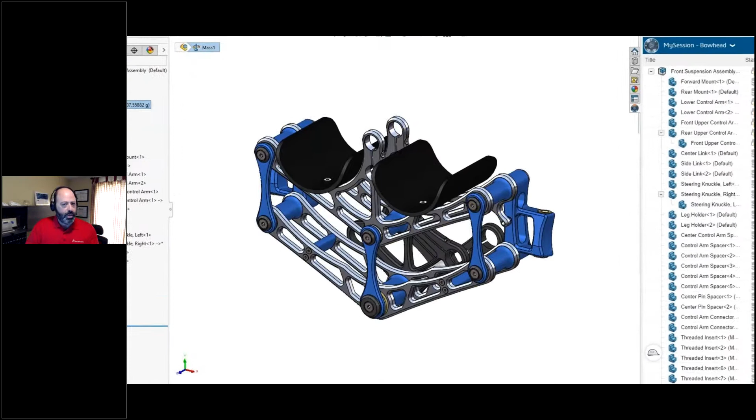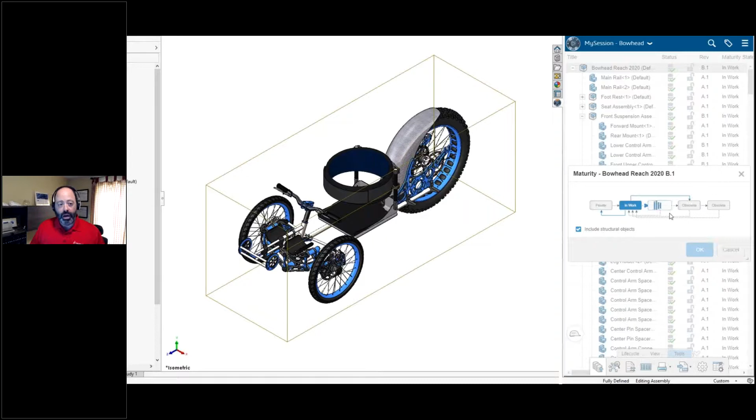For example, I make a design change and I need to know what other assemblies or parts this is going to impact. I have a visual reference of everything that touches this design. I can also use what we call maturity states to control the life cycle of the product - so it's in work, then I put it to frozen because I want to do a design review. And then we can go even further to do issue management and change action, to really track design changes.

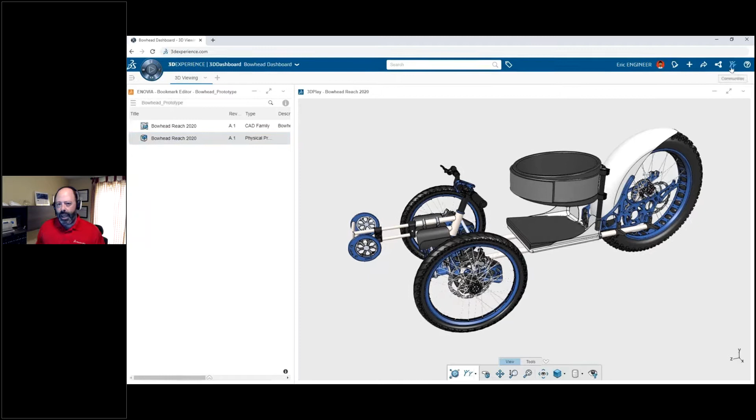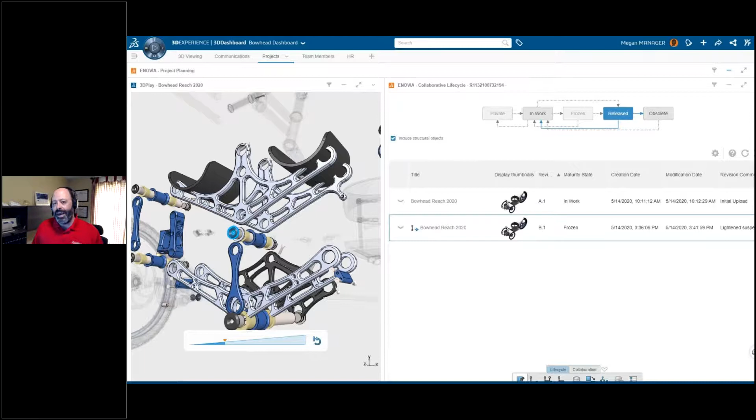Furthermore, since the data is now stored on the cloud, I have access to that data using any type of browser, on any device. So if I just need to visualize the data, I just need an iPad and an internet connection. I can even pull that into a project planning tool - we have that. I can review revisions, I can change the life cycle of the product. So if I'm at home and I just want to review a design and approve it, I could do it from my iPad. I don't need a computer, I don't even need SOLIDWORKS, because the data is hosted on the cloud. So it becomes very easily accessible, and we can actually do quite a bit from there too.

Now, when we talk about Collaborative Designer for SOLIDWORKS, who's it for? It's a tool built for engineering teams that are not currently using PDM. Not because we don't like you if you are using PDM, but if you're using a typical SOLIDWORKS PDM Standard and you want more functionality, like being able to access data from the internet, well, there's an upgrade path to go to PDM Professional. It's the same system, works the same way - there's no migration of files to do, anything like that, so it's much easier.

And if you have PDM Professional and you want to do resource management, project planning, well we have another tool called SOLIDWORKS Manage that's built on top of that. So it's very easy to upgrade if you have a traditional PDM tool, whereas Collaborative Designer is really built for people that don't have anything today, but they want a centralized, secure place where they save and control all their data.

The other benefit with Collaborative Designer for SOLIDWORKS is that you don't need any servers, you don't need anything to host the files. The files are hosted at a data center and everything's being handled there. The only thing you need is an internet connection, that's it. So if you don't want to invest in a server or invest in software to host the server, you don't need any of that - everything's done on the cloud.

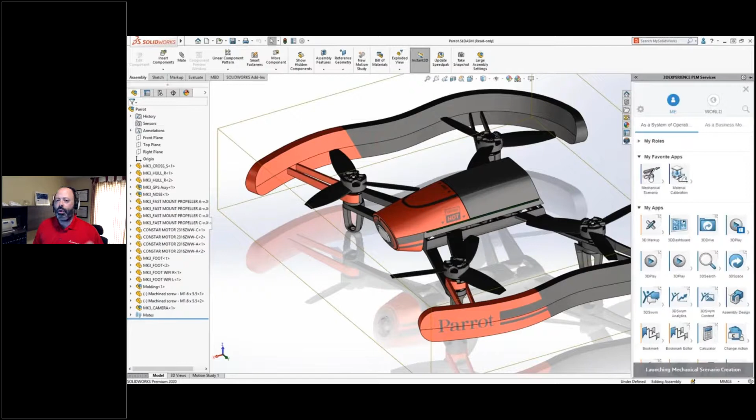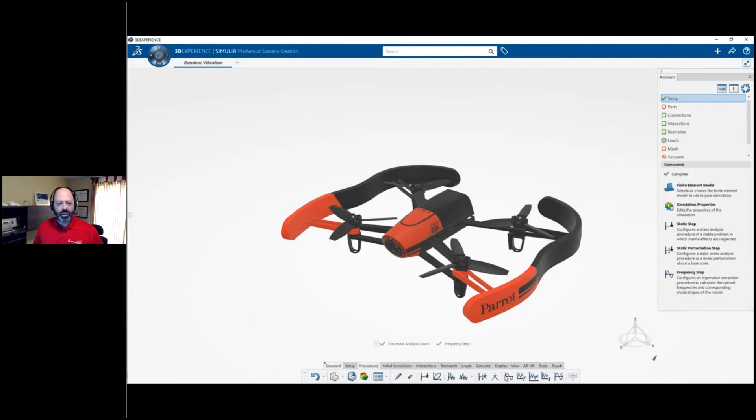So again, we start from SOLIDWORKS, but from SOLIDWORKS we're going to save to the cloud, and then we're going to leverage tools dedicated for simulation. Here we'll walk through an example where I'm reusing the SOLIDWORKS data to create a vibration analysis. This little drone tends to vibrate because of the motors, but also because of the turbulent air going around it. So I want to make sure that my electronics is going to survive this.

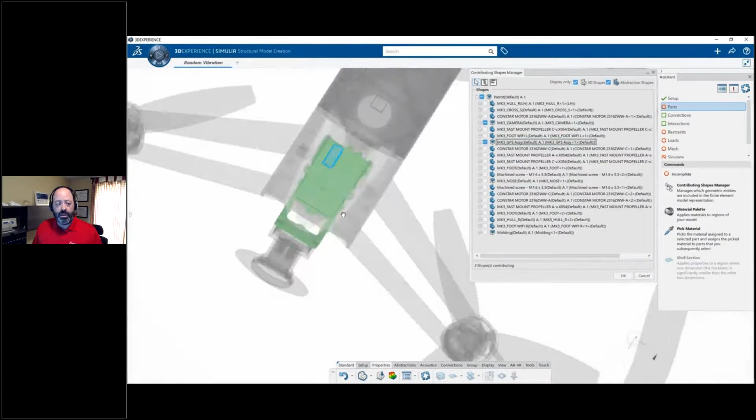If you've done simulation before, you'll see that it's a very similar process. You start by setting up your simulation, what type of simulation, and then you're going to select which parts of this whole assembly. I don't want to analyze the whole assembly. Really what is critical here is the electronics, so I'm going to select the electronics to define that this is what I want to analyze in detail.

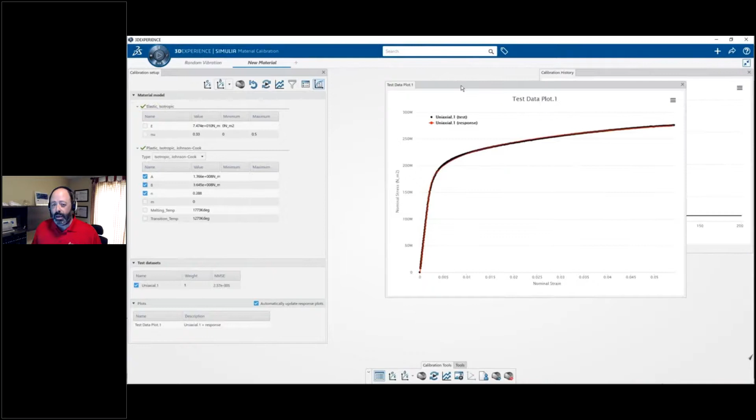Then I'm going to assign material. There's a library of material, you can create your own, you can import material from the SOLIDWORKS design if it's there. But there's a nice option here where you can define your own material based off physical testing. Very common if you're dealing with a lot of plastics and things like that, you can create physical tests, get the test data, and then create the model, the physical properties for that material, and apply that to your design.

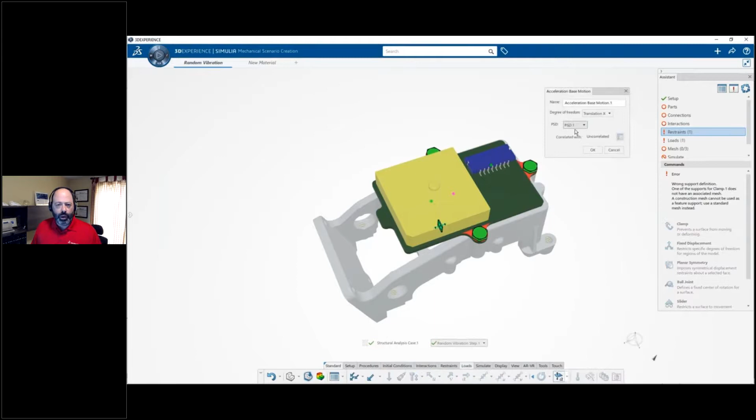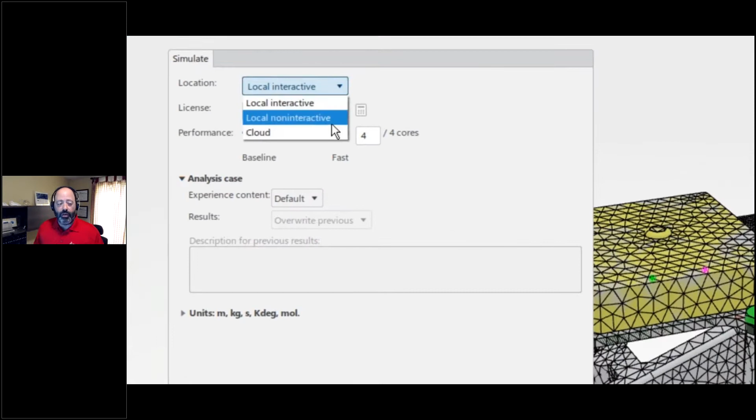Once you do that, the next step would be to define how the assembly is held in, how the parts are supported in the assembly. We've got a lot of shortcuts and what we call connectors to help you do that, like bolts and screws and things like that. Just saves a ton of time. There's a lot of automatic meshing capabilities, but also more advanced meshing capabilities with quality mesh checks, so you can verify that your mesh is good quality.

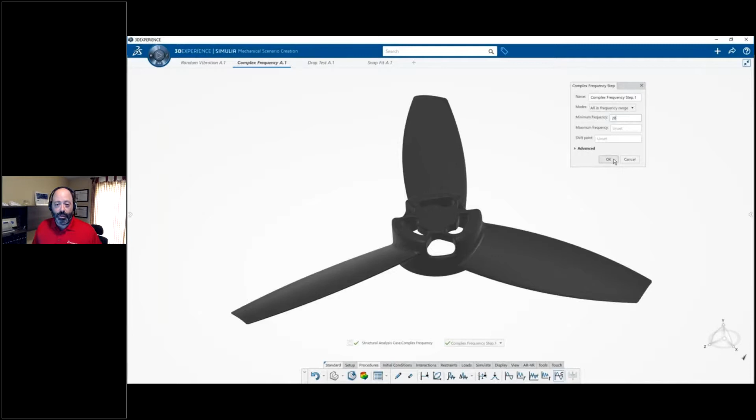One of the big benefits is also the ability to solve using the cloud. Rather than solving on your local computer, you can send the calculation to be solved on the cloud, which is much faster for very big problems or solutions that need a lot of computational force to solve. Again, a bit more examples here.

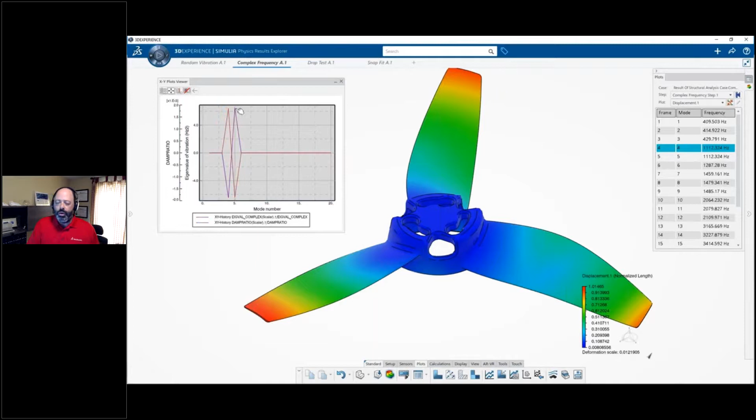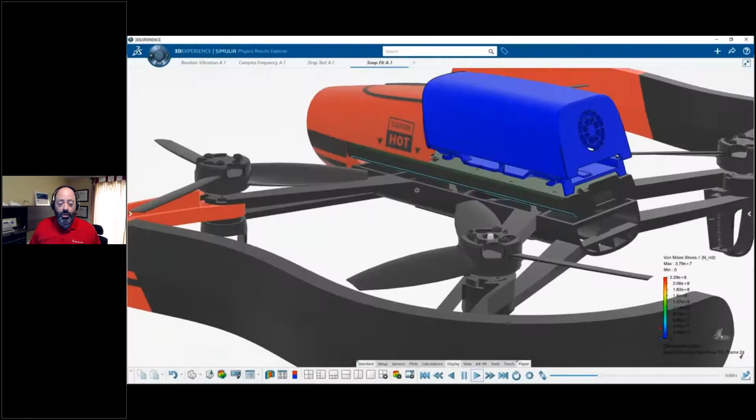We're looking at vibration analysis, but it's really getting into some of the more advanced simulation. We have tools on our current desktop products with SOLIDWORKS Simulation, Simulation Professional, Simulation Premium, but in some cases you actually need more capabilities—like advanced drop testing, think hyper elastic material, complex contacts that you need to solve, and maybe just very large simulation problems. This tool is really great to do that.

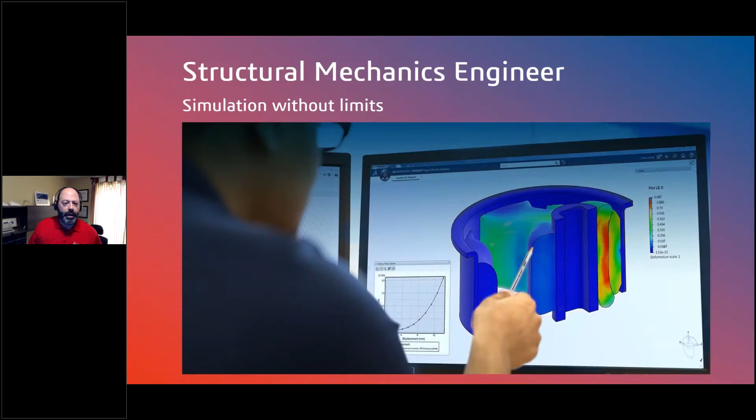So it really goes beyond what we can do in our traditional desktop product line. If we recap quick, who's it for? Structural Mechanics Engineer is for when you need advanced simulation capabilities going beyond what we can do in traditional SOLIDWORKS Simulation. Some companies, some people, just want to use the Abaqus technology, and that's what we're using inside of Structural Mechanics Engineer. If you're not familiar with FEA, Abaqus is the most powerful solver on the planet right now, being leveraged by automotive, aerospace, defense industries.

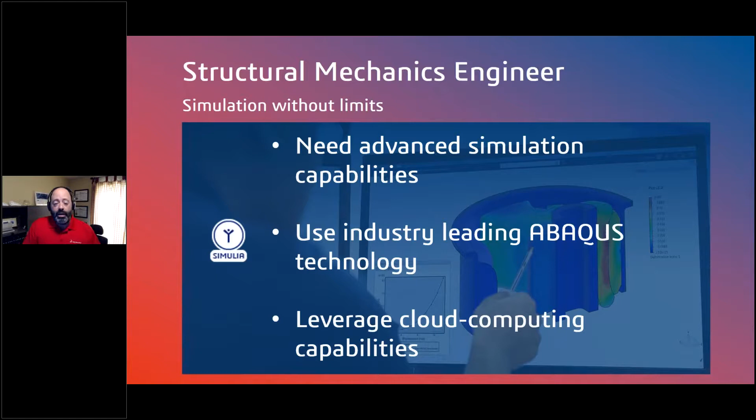So very high-end type of simulation and technology. Also a big benefit here is that you can leverage the cloud computing capabilities, so you can set up the simulation on your computer, but then send the calculation, the solving, to the cloud so you can solve it a lot faster.

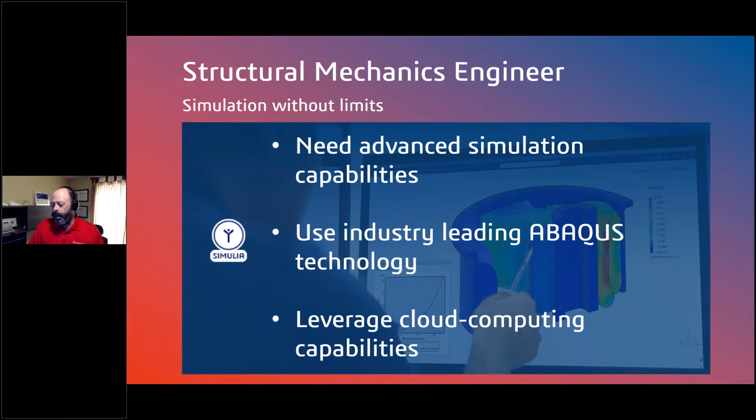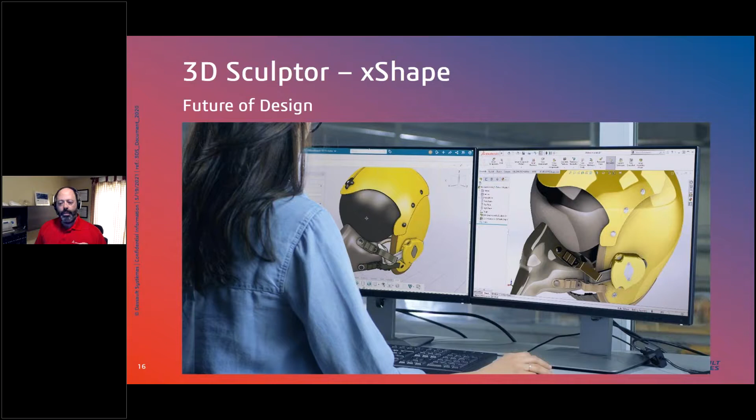Now we talked about simulation, let's get back to design, right? So if you're here, you're likely a SOLIDWORKS user. I'm going to show you something that you're not able to do inside of SOLIDWORKS, using a product called 3D Sculptor or xShape. Really, this is for users that need to do organic shapes. If you do a lot of surfacing, the swoopy curve kind of model, this is for you.

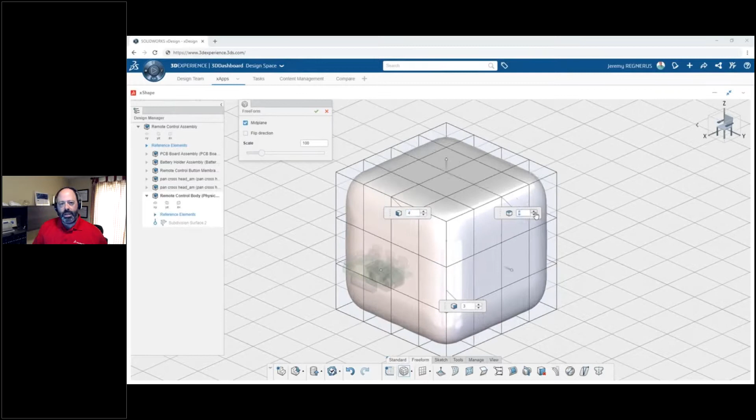So I got this example where I got a remote, like a TV remote, but the core components are done inside of SOLIDWORKS, and I want to have a nice shell going over it. Now typically inside of SOLIDWORKS you would start with planes and sketches and splines, and control the curvature of those splines and tangency control and all that.

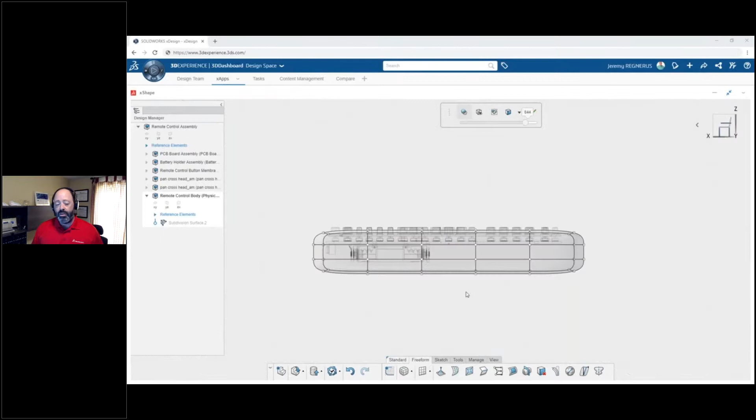Using 3D Sculptor, it's a very different approach. Rather than starting with a sketch with splines, we actually start with the primitive shape, and then using different types of control—you're going to see some of them here—you're actually going to just push and pull and get it into shape.

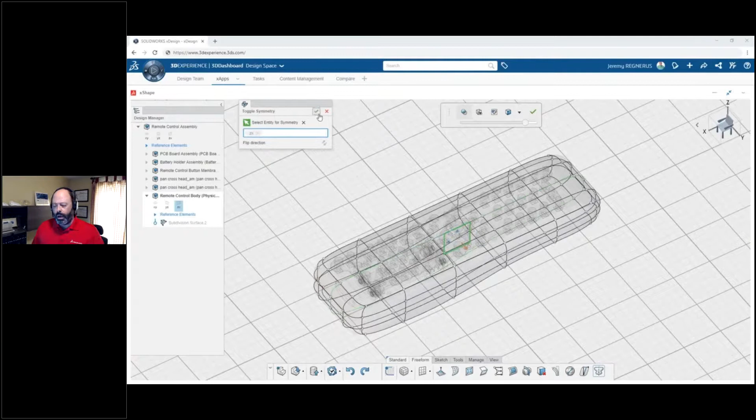See, so we simply window select some of those control points using the little robot. We simply push and pull into the shape we want this part to be. You could also, we didn't do it here, but you could import a background image and use that as a starting line. But see how easy it is, you just push and pull.

Here I've added a symmetry plane just to make sure our remote is symmetric. Now everything I do on one side of the remote is being applied on the other.

Now you saw me pick the control points. We can also change how we control this shape. Here we're also using what we call the cage, which surrounds that model. It's just a different approach of how we control the modeling of this part.

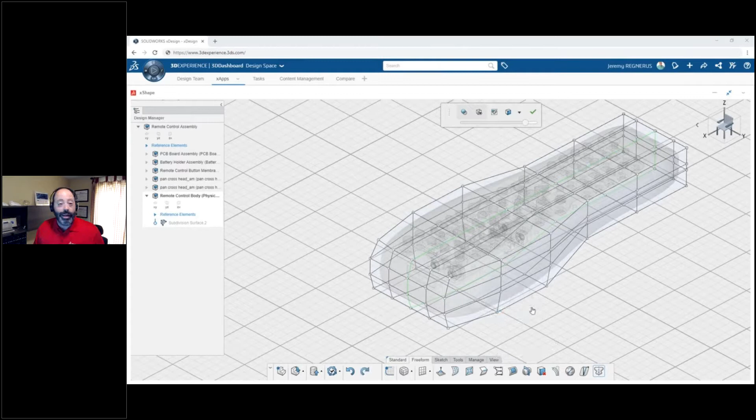So you see here, it's very, very easy. There's no sketch involved. You could use a sketch if you really wanted to, but oftentimes you just don't need to. You just push and pull into the shape you want. You can use the points, you can use the curves, what we call loops here, and faces as well. You basically really just push and pull into shape.

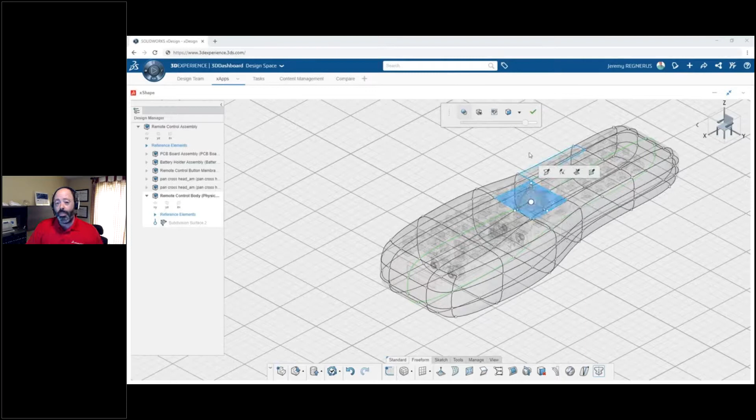Now I used one primitive. You can actually add more and then do some Boolean operations like adding and subtraction, add a fillet at the base of these two combined objects. So again, very, very easy to mold it into place.

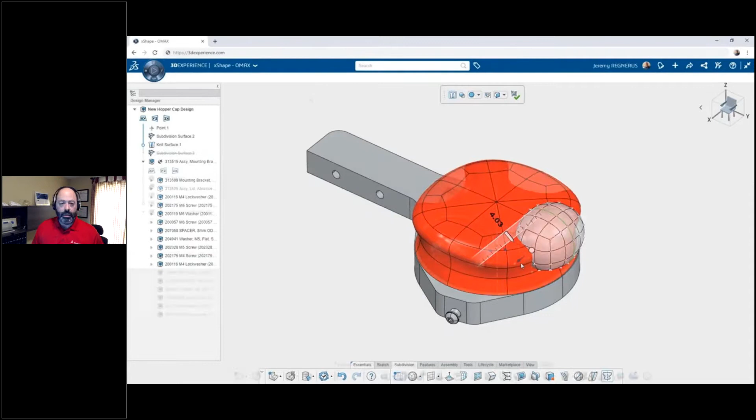Here's another example for a handle where I want to have that shape, so I do a Boolean operation to subtract. Again, everything you need to design that has some organic shape, complex curves, curvature is really important. xShape, or 3D Sculptor, is a great tool to help you do that.

So let's recap real quick. Who's it for? If you're doing any type of organic shapes or complex surfaces, this is likely a tool that you'll want to touch on.

One of the benefits, and we didn't see it in the video but we'll talk over it when we do our sessions, and I think it makes sense to do a session on 3D Sculptor by itself, is the tight integration with SOLIDWORKS. There are other tools on the market that can do some of that, but if you want to work with SOLIDWORKS, like for example the remote, I would have needed to export the remote out of SOLIDWORKS first, import that into another software, maybe do the modeling there, and when it's done, bring that shape back into SOLIDWORKS.

So it's just really hard to do all of that. With xShape, it's a drag and drop, and nothing more to do, right? So it has a really tight integration with SOLIDWORKS.

One of the other benefits with xShape is that it's a fully cloud-based tool. What I mean by that, it runs inside of your browser. So a lot of designers like to use Macs, they like to use iPads, one of the benefits of those devices is they're really touch oriented, or you can use a touch or your stylus.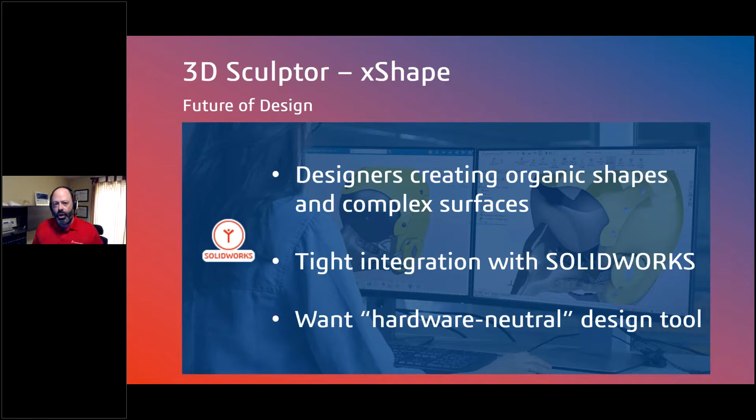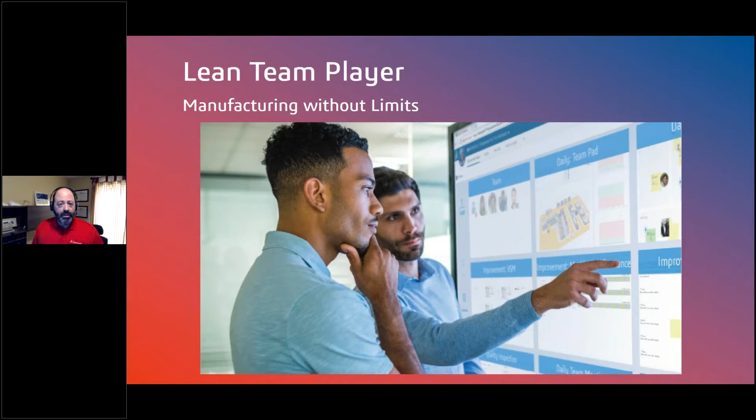So we talked about design. The last category I want to talk about is manufacturing. And I'm going to start with this first tool called Lean Team Player. Let me ask you this.

How often, pre-COVID, were you in a meeting looking like this, where you're not sure why you're in that meeting, and you see probably half of the people in that meeting doing something else? Happens in web meetings as well.

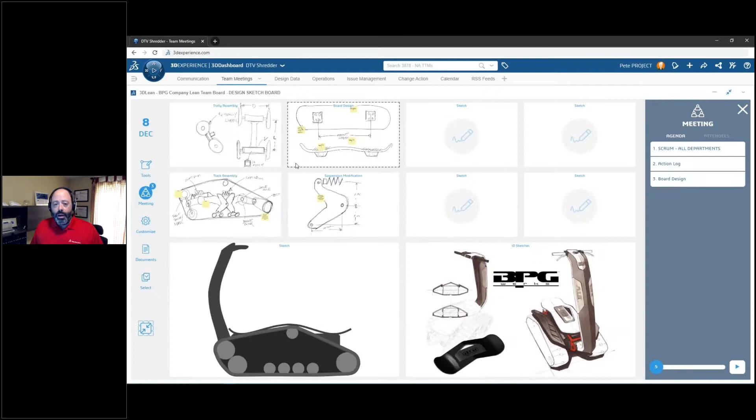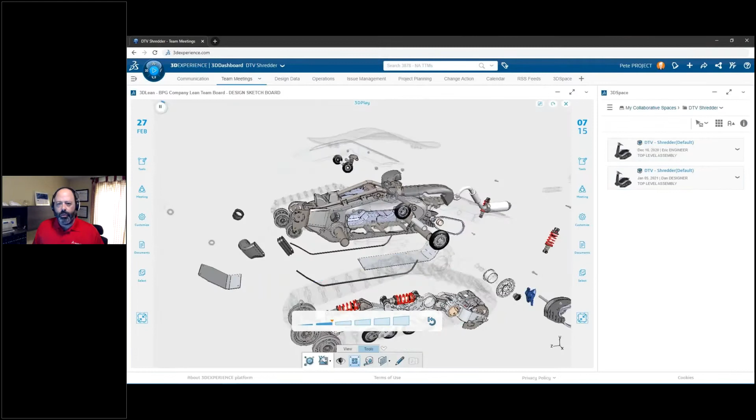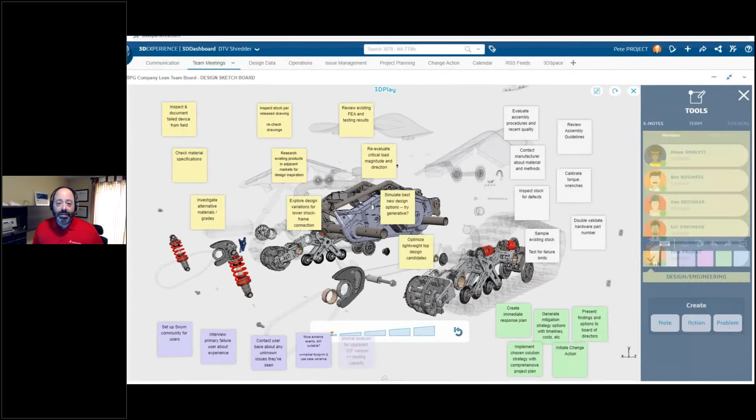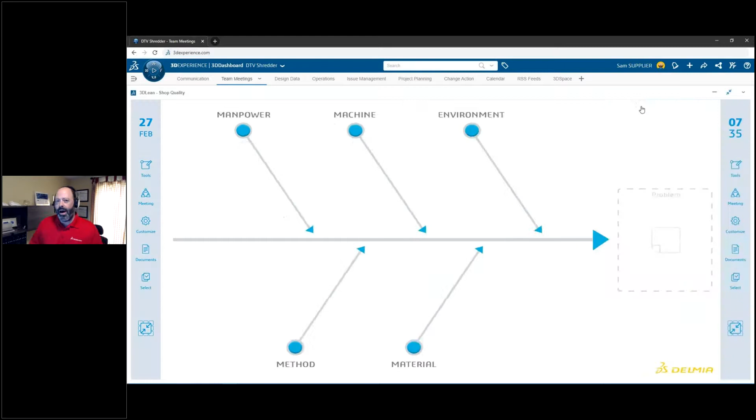So you can actually bring in your SOLIDWORKS models, add those post-it notes. This is really a collaborative environment, so we could have like 3-4 people working on the same whiteboard at the same time. It's basically a whiteboard, but it's digital. You can actually assign tasks on the fly. So as you're doing a meeting, you can assign responsibilities to users or people on your team, assign who's going to be doing what, following up the meeting.

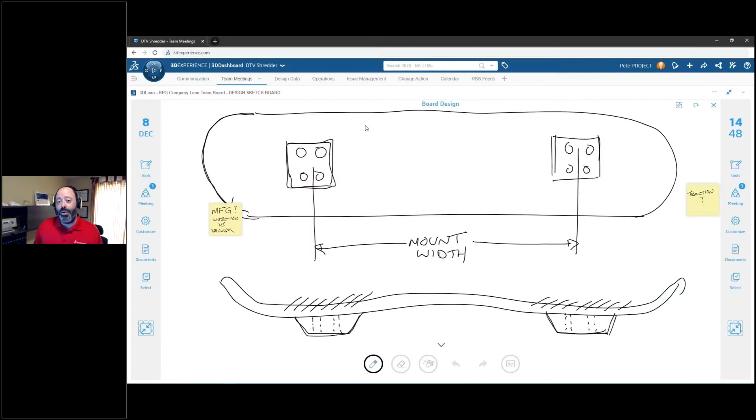Ask yourself, how often have you come out of a meeting and you're not sure what's been decided? Here's a great tool to actually take action following a meeting. You can even send that into a project planning tool to create those tasks for people and plan the project.

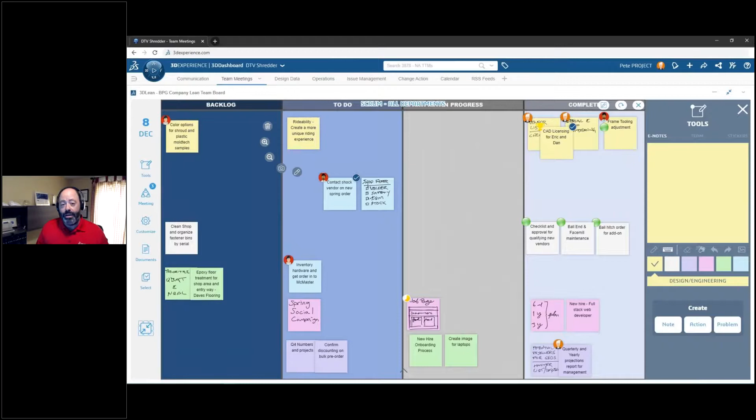It's a great tool to help team members collaborate inside the same meeting. We could have 3, 4, 5 people or more collaborating on the same whiteboard during a meeting. So Lean Team Player is meant to simplify and structure the team meetings we're doing, whether live or web meetings. It works for both applications just as well. It helps get real-time decisions and actions, and assign actions to what we decide in the meeting. It's really collaborative and easy to deploy. It's web-based, nothing really needed except a browser, and very easy to use.

Now the last tool I'm going to talk about, really about manufacturing, is NC Shop Floor Programmer. You saw the picture and probably get it by now. It's a tool to help you program CNC machines. It expands on what we can do. If you have a SolidWorks subscription, you have access to SolidWorks CAM, but this expands much further. First of all, it's a full 3-axis milling machining tool.

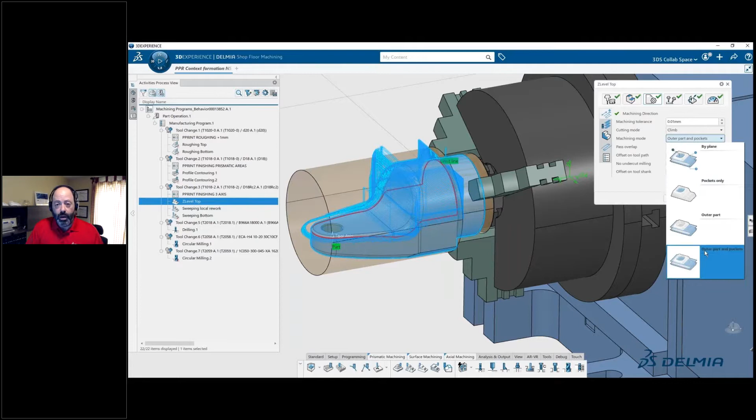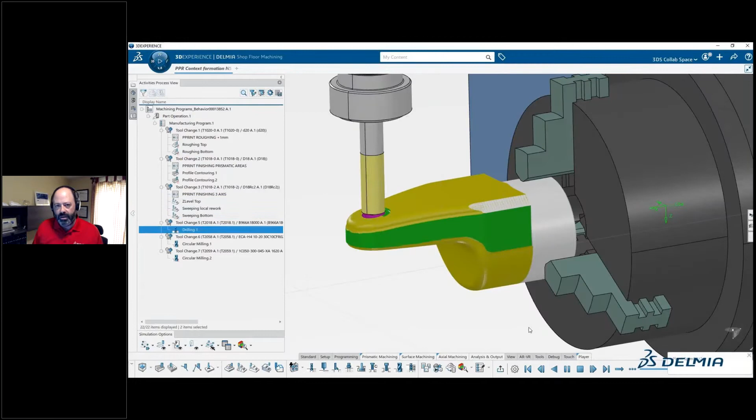We can do full 3-axis machining. We also have more advanced capabilities like high-speed machining built in. Here we're setting up this program for the CNC, and when we're done, we can also simulate the toolpath. But different from SolidWorks CAM, where it's only parts, here we can actually simulate the toolpath with an assembly, with the actual machine that's going to manufacture the part in the simulation. It's not just a jig and fixture, we're simulating the whole machine, so it's advanced toolpath simulation.

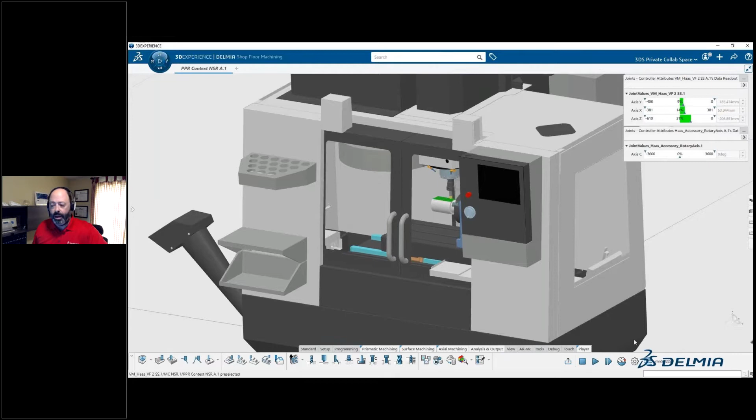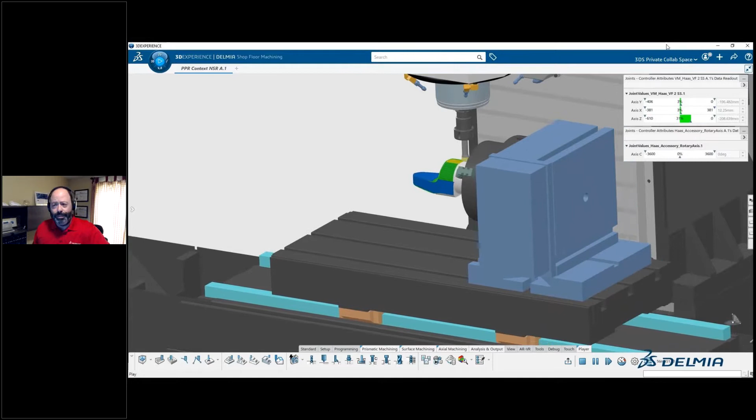Here we're doing it with the full milling center. You can see the part running inside being machined. If I hide the outer shell of the milling center, we can drill in, and as you can see, we're really simulating the full potential of toolpath simulation with advanced machine simulation as well. As it's going along, you see different colors meaning different passes with different tools, the color differentiating whether we're roughing or finishing or which tools we're using. So again, it's about taking your SolidWorks design and manufacturing it by programming your CNCs.

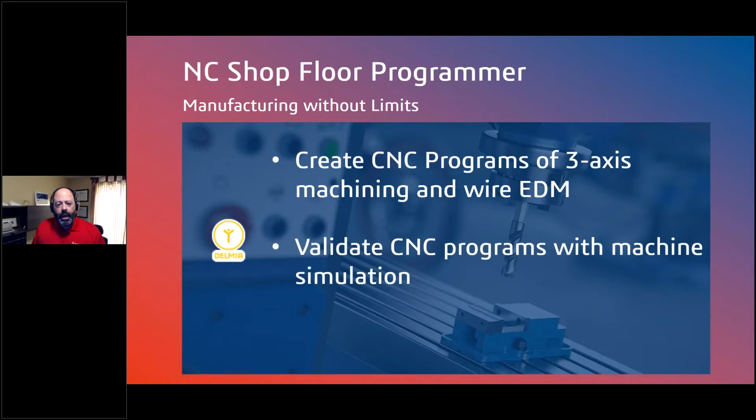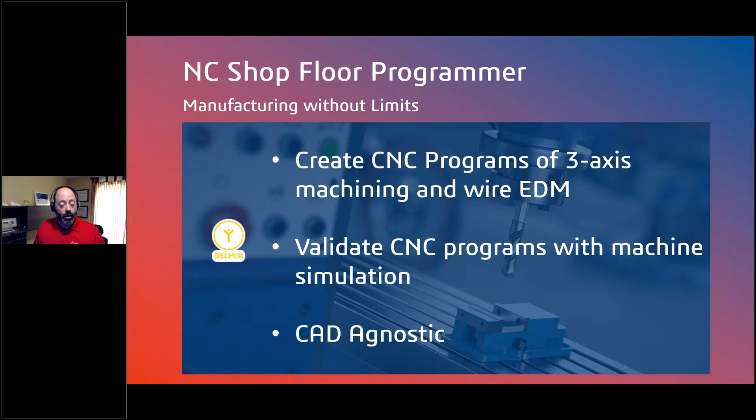So to review NC Shop Floor Programmer: it helps us create the CNC programs for 3-axis machining and wire EDM - I didn't mention that, but it does support wire EDM. It also lets us validate the CNC programs with machine simulation, so you can detect clashes and things like that. It's also CAD agnostic. If you're a SolidWorks user, great, you'll be able to use that data in NC Shop Floor Programmer. But if you're receiving files from customers in different formats, or you're a machining shop, you don't need to bring that into SolidWorks first to do the programming. You can go directly to programming, skipping SolidWorks entirely if you're just getting a file from a customer or another department that needs to be machined.

So when we look at the platform or cloud portfolio, there are a lot of different tools built in. I talked about 5 today. We started with data management on the cloud with Collaborative Designer for SolidWorks, managing revisions of files and access control. We talked about simulation to do advanced simulation not currently possible in our desktop products. We also talked about design with a subdivision modeling tool called X-Shape or 3D Sculptor for organic, smooth consumer product and industrial designs. Then we talked about manufacturing: Lean Team Player to organize meetings, whether manufacturing, design, in-person or web, and NC Shop Floor Programmer to program your 3-axis CAM or wire EDM.

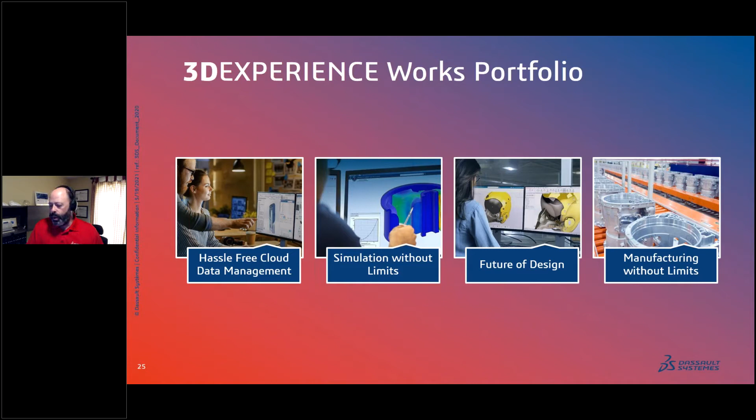As I said at the beginning, we're focused on four different pillars, the main ones that we see in your traditional flow: design, simulation, data management, and manufacturing. These are the pillars we're focusing on today, just to give you a flavor of what's available.

And Michel, you need to keep my slides going though. No time to drink.

I'm sure you understood from the notes, slides, or video at the beginning that the intent of all this is not to take away your SolidWorks. We want to keep your SolidWorks. We want to add to it all of these other functionalities.

Yes, you can find a lot of functionalities from our desktop products, but you'll also find a lot of these functionalities and more elsewhere, which is the 3DEXPERIENCE. Some of this is collaboration. Collaboration is more than just the ability to share files. It can be the ability to share ideas, to exchange on ideas, to work on things together from a textual, sharing images, format, or tasks, whatever it is. There's a lot of things that surround collaboration of data, of information.

Of course, there's the marketing part of your company. So there's roles for a whole lot of different aspects in your company that are touched by these cloud applications. We only showed a few, sometimes just one in each of these cloud bubbles, but there are many more. So all of this is part of what's called 3DEXPERIENCE.